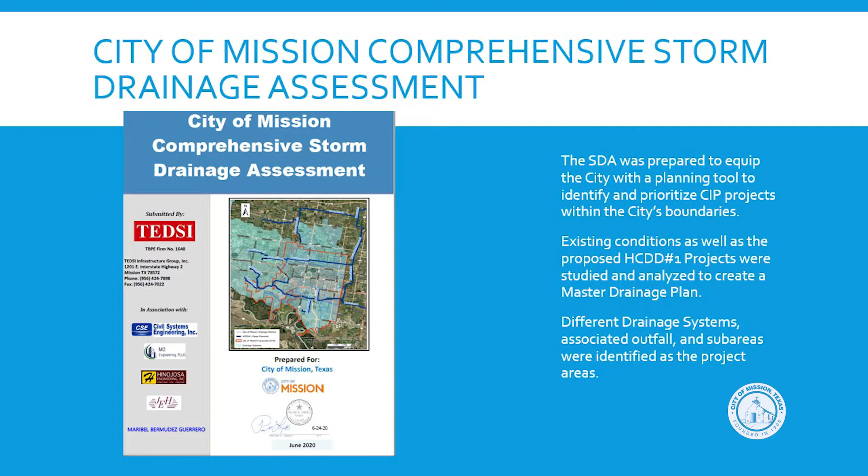We did a comprehensive drainage study, and that identified about 70 projects throughout the city, some major, some minor, some that we can do in-house with our own staff and not necessarily subcontracted out. So we looked at the top priority. Our consultant engineer prioritized the projects, and we looked at the projects that had the most concern.

So we talk about it almost at every city council meeting. You guys are really fast tracking it and making these the focus for our city, working on it really quickly. Yes. Okay, can you tell us about them?

Yes, right now they're all on the design phase, all 7 projects, and we're doing all 7 at the same time. So that's very unheard of, doing them all at once. Yes, because we want to start all 7 projects to impact the community as soon as we can.

As soon as we finish the design phase from the engineers, we'll put it out for bids, receive those bids, and start construction of these projects. We're pushing our consultant engineers to speed up the planning process so we can start construction, because we want to see shovels on the ground, replacement of pipes and drainage pipes and so forth. So that's what we're working on.

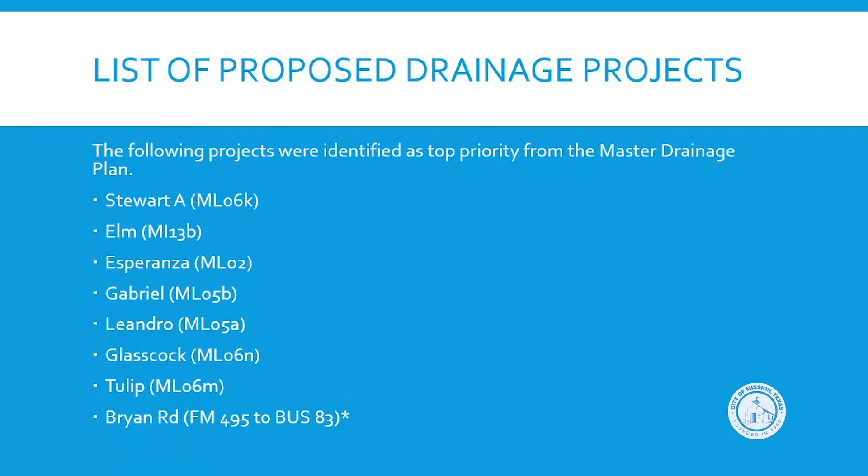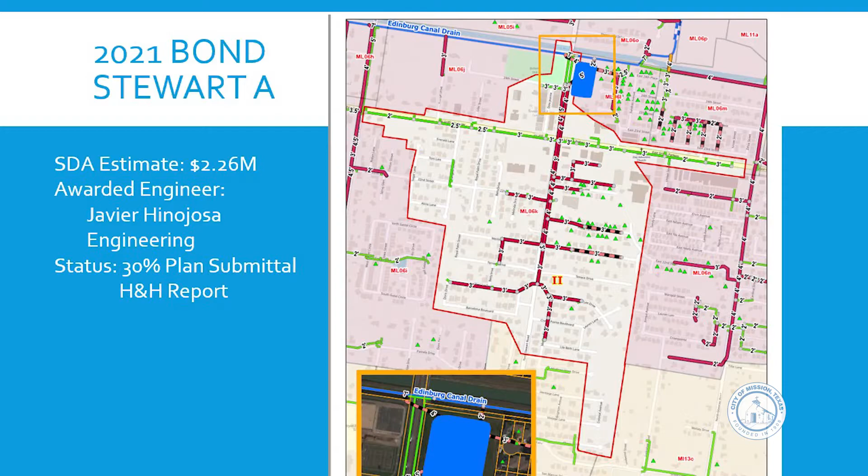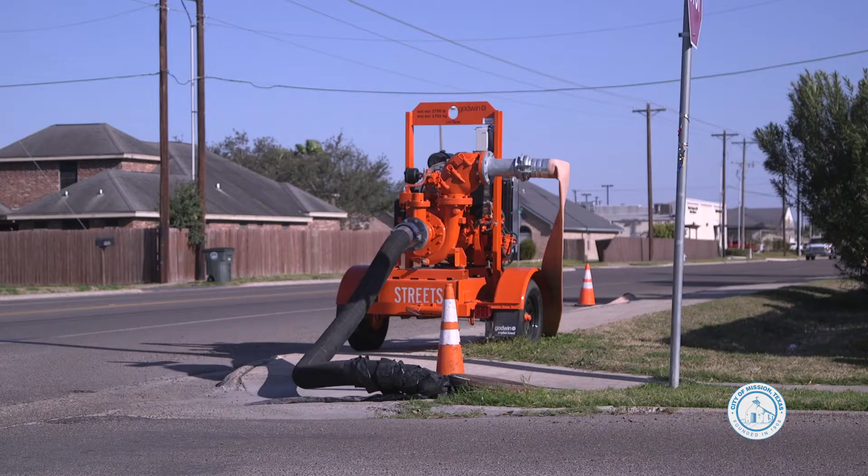So what we're doing there is upgrading the drainage pipes in that area to include within the subdivision, which is 21st and a half, Terrace, and Merlin, those particular streets. If you're familiar with that area, just north of 495, all the way to the Edinburg main canal, which is the irrigation canal, it's going to cross Griffin Parkway.

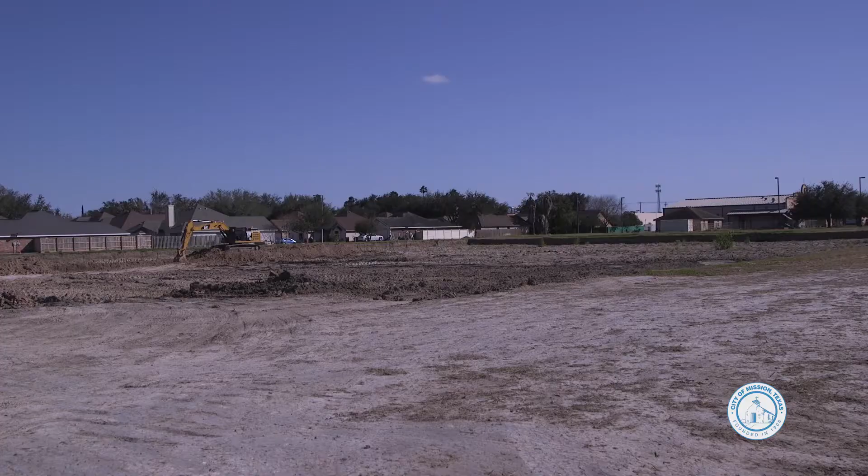One of the things the mayor and the council were able to approve is to acquire some property in that area — approximately over 4 acres just north of 495 next to the church that's there on 495, for the detention pond.

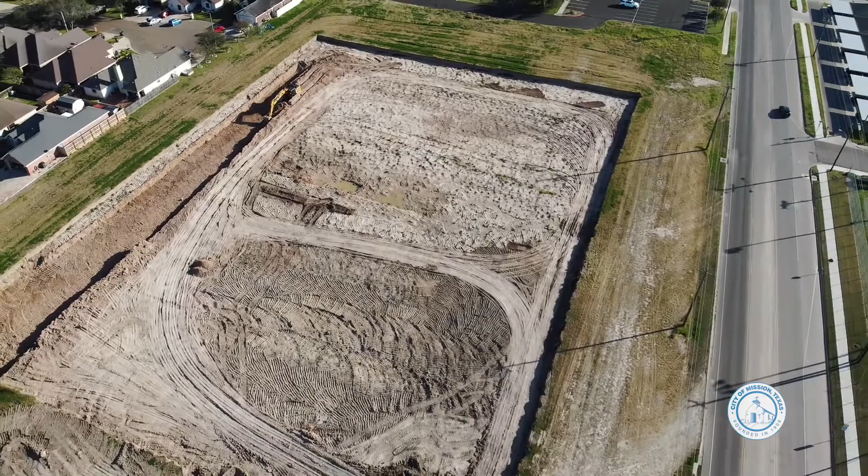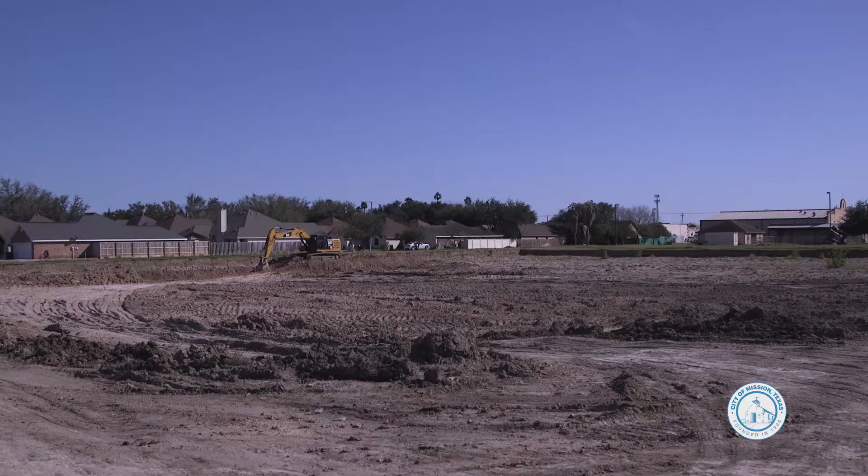This project in particular, STEWART, will take some time to develop and construct. But in the meantime, what we're working on in-house with our own staff is the 4 acres we purchased — we're creating a detention pond. The detention pond will be situated along Stewart Road, parallel to our ditch. That allows the water to flow into the ditch and hold it in the detention pond, slowly flowing into the ditch and slowly receding out.

So that's the Stewart project. Again, that's one of the main projects we're working on, one of the areas with the most concern.

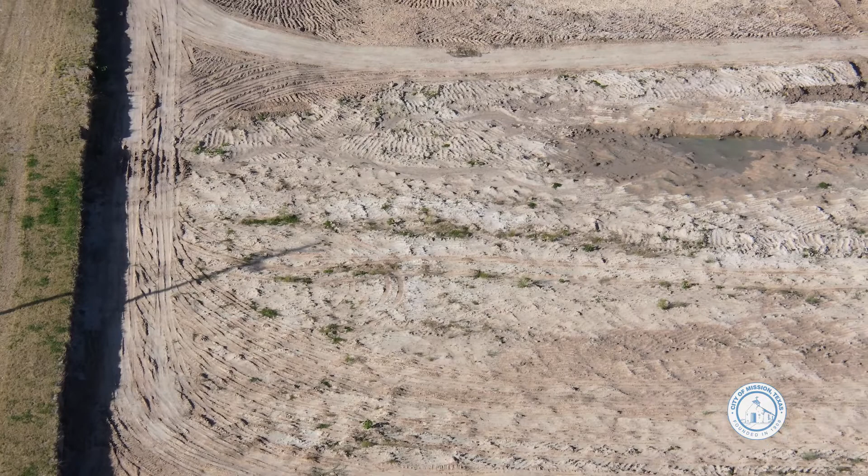So that's our first project that we're looking at. If you live in Mission, we know when there's heavy downpours that Stewart is an issue area. So the residents have to be overjoyed that this is happening.

Yes, we just ask that they're patient with us, because these projects do take some time, unfortunately, but we are working, and that's the important part. We're making progress on this particular project that would alleviate that area, and in the meantime, that detention pond would definitely help while we construct the improvements on Stewart Road.

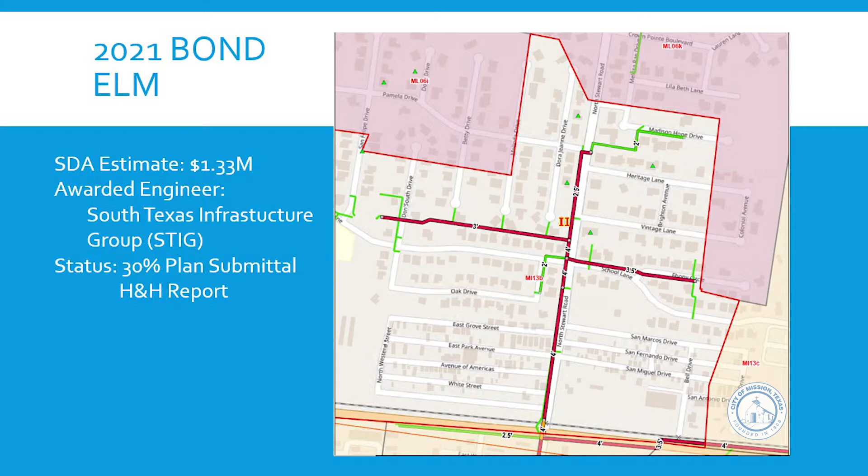So that's the idea, is to continue working on that. Okay, next one? Yes, so the next one we're looking at Elm, and this is approximately about $1.3 million. This is the area between Bryan and Stewart.

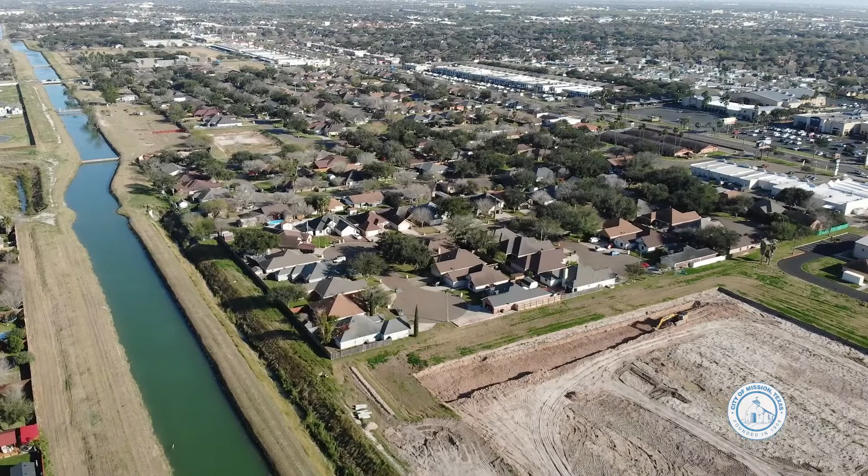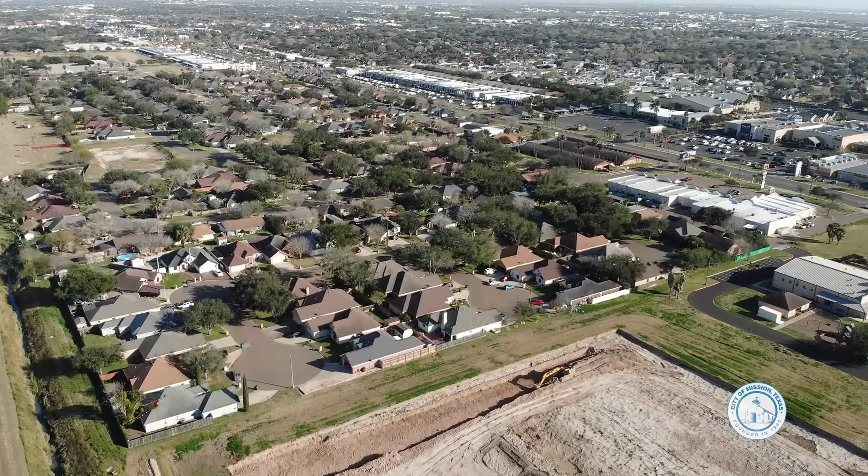Again, same general area. Stewart, this area will impact School Lane, Elm, and Stewart, also Bryan Road. So we're upgrading drainage pipes there as well. That would alleviate that area, and alleviate Stewart going south. Stewart has drainage that goes from half of Stewart between 495 and Business 83, half goes south and half goes north. The southern portion would be alleviated by this improvement on Elm, and also connect into School Lane in this particular project.

Yeah, it's going to be a drainage facelift for that entire area then. Okay, good. Another area that we looked at, again heavy downpours, we're constantly working with, is the Inspiration area just north of 495.

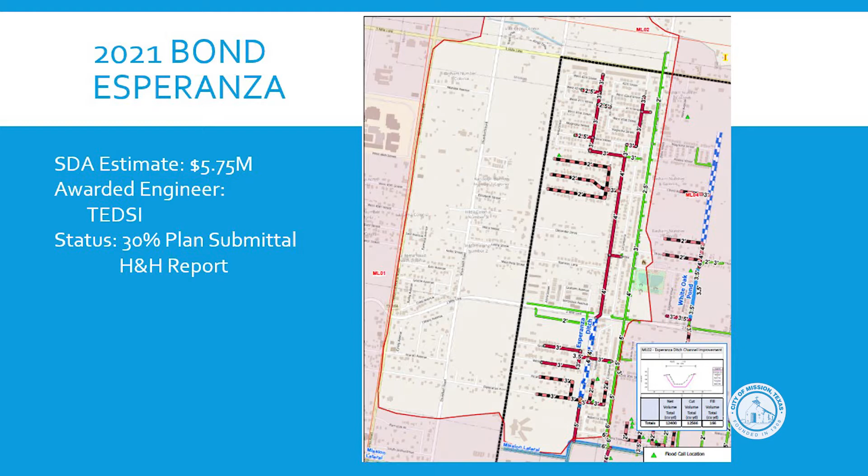This is a larger project, because this project will go all the way to approximately the 1.5 mile line, which is just north of 495, to almost the 3 mile line. It's approximately about $5.7 million on this particular project.

Remind me, what is the name of this subdivision? This is El Valle subdivision. Yeah, so all this area, and these next couple of projects, will assist the El Valle subdivision north all the way to the 3 mile line on Inspiration.

We have grown a lot in that area north of 495, and so we're increasing the size of the pipe. Currently, for example, a pipe is 24 inches, well, we're increasing that to 36 or 42. It just depends on the specific project and area. These are all engineered, so the engineers are looking at the capacity that the area needs.

And so that's what we're looking at. We're obviously going based on their recommendation. This is one of the largest improvements that we're doing, because it'll feed into the subdivisions that are adjacent to it on the east and west. So this is definitely a beneficial project for this particular area.

The folks there have been very vocal about wanting our assistance, so I guess this is a good time to say we're listening to what they're saying. Yes, absolutely, and we've had several community meetings with them within their subdivision, and we've placed temporary pumps out there on occasions when needed, basically to help pump out the water from the streets, not necessarily from their homes. That's something we're constantly monitoring in that area.

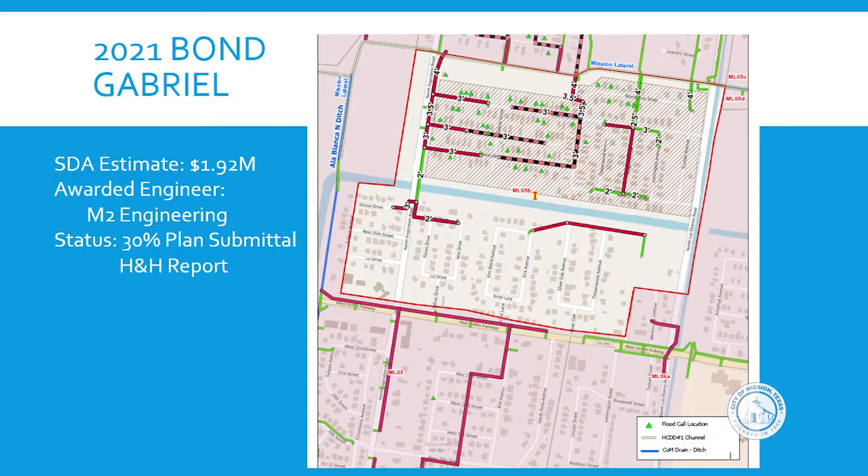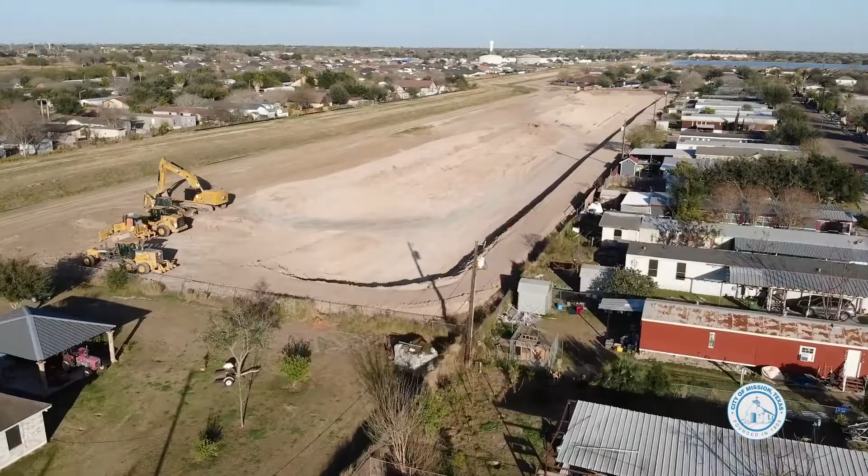So we're looking south of the Mission Lateral, north of the Mission Lateral, for all this Inspiration Road. One of the things we're working on, recently announced, is partnering up with Precinct 3 Commissioner Villarreal on drainage projects, because we share areas within the county. We were able to acquire 4 acres adjacent to the Mission Lateral that would directly benefit this particular subdivision.

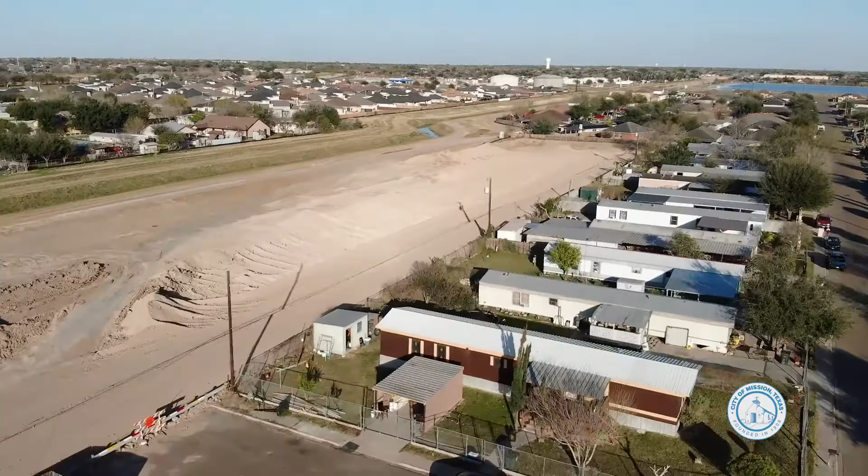And so again, they're building another detention pond like we are on Stewart, while phase 3 of the lateral is expanded in that area. In the meantime, they're going to be creating this detention pond, which will be completed a lot sooner, and that would be alleviating things, because we, as the City of Mission, will be connecting the El Valle subdivision to this detention pond.

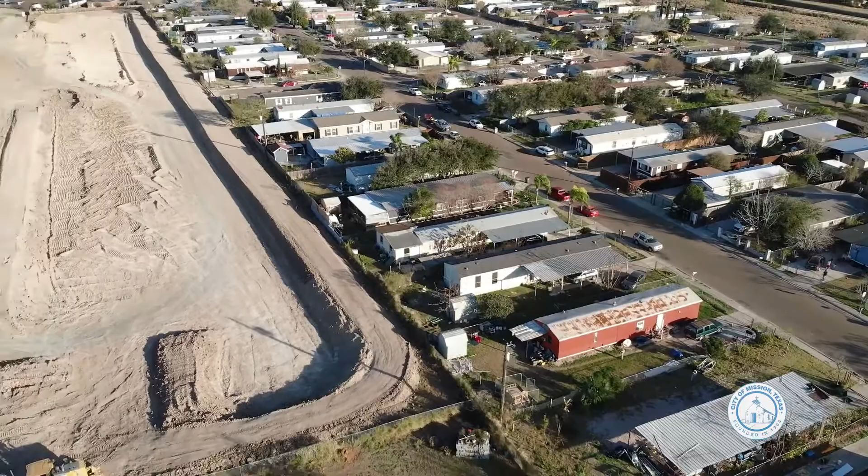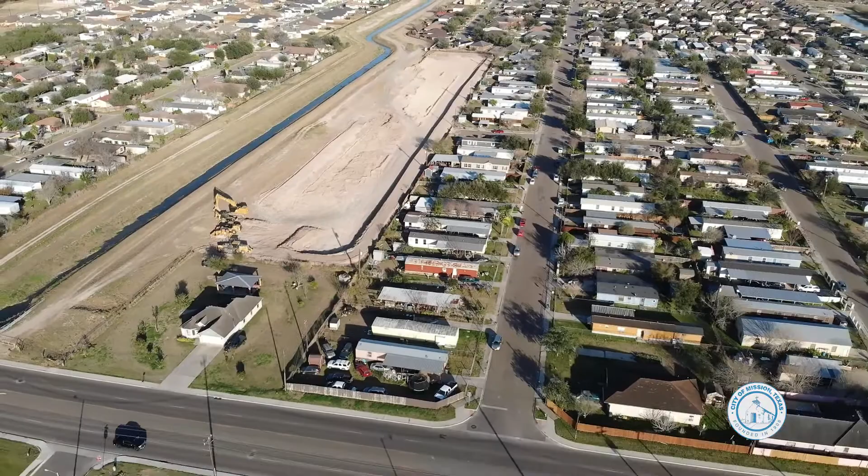It will benefit El Valle subdivision tremendously, and the surrounding areas, but specifically the area that's adjacent to this particular drainage ditch. So we're looking at long-term drainage improvements, but at the same time there's definitely a sense of urgency, because the residents need assistance from us, and these are kind of like a temporary fix too. Yes, I mean, they're temporary in the sense where they could be done a lot faster.

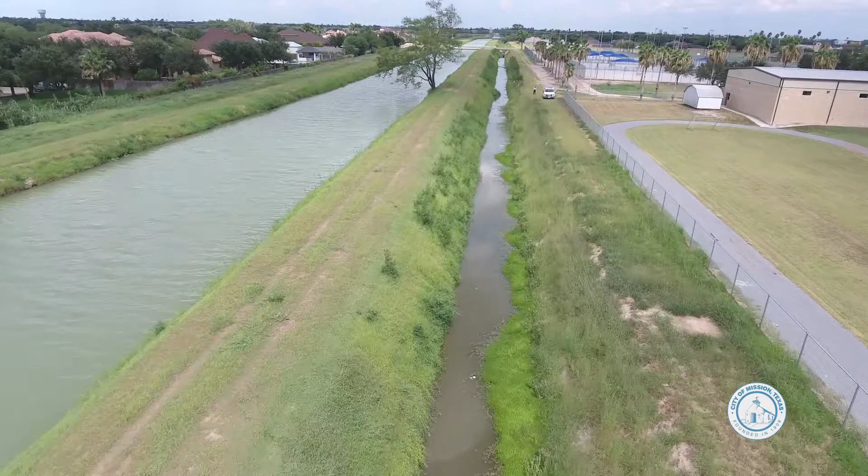Part of the engineering plans that the Drainage District recommends is having detention areas throughout our city. What that does is help the main ditch hold water and slowly release it into the ditch, instead of everything going in all at once. That's part of the plans, and part of why we're looking at property throughout the city for that particular purpose.

The next project within the same area is Leandro, just north of the lateral. We're also looking at Inspiration, Esperanza, and Gabriel, all in the same vicinity north of 495 on Inspiration. A lot of improvements in that area. This is an additional $1.6 million project, all upsizing drainage pipes to increase capacity.

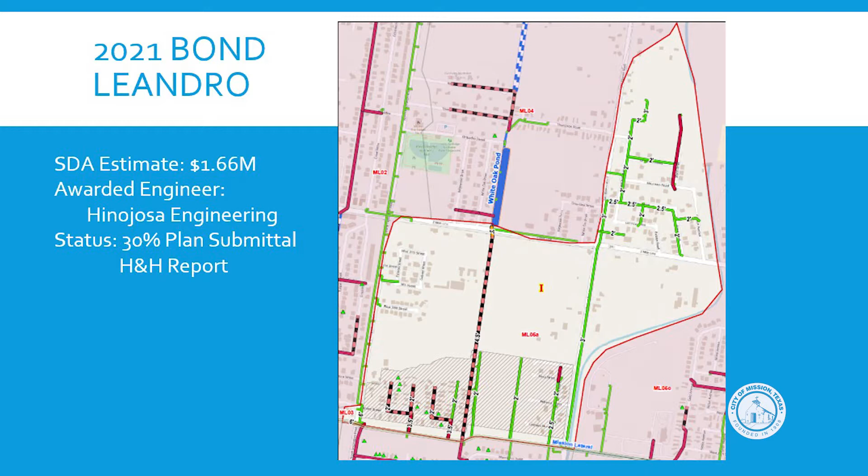The ultimate goal is to drain our streets efficiently and rapidly, to be able to put the water into these detention ponds, and then into our drainage ditches.

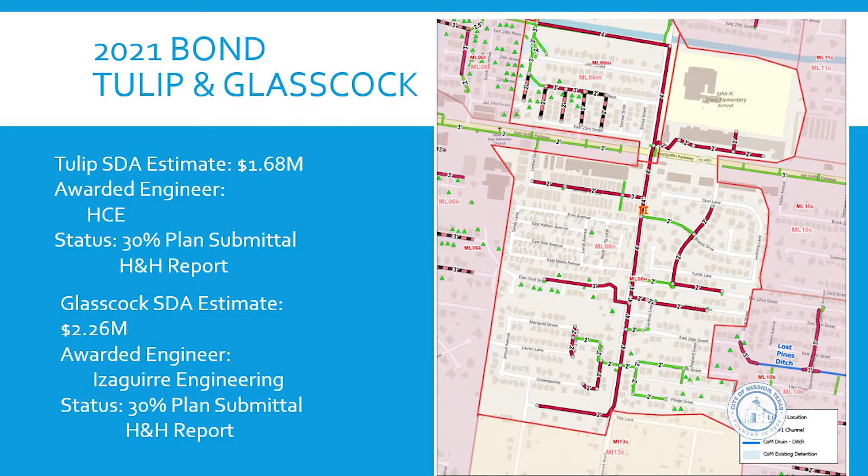The next one shifts to the other quadrant of the city, looking at the GLASSCOCK area, also north of Business 83 to 495, just north of 495 as well. We're calling this the TULIP and GLASSCOCK project because they're interconnecting. It's along GLASSCOCK north, and TULIP is just north of 495.

If you can picture where John H. Shary School is, that vicinity going south of 495 - that's where we're looking at the TULIP project, approximately $1.6 million, and GLASSCOCK is an additional $2.2 million. So that's a big project. Yes, absolutely. These projects would benefit the area.

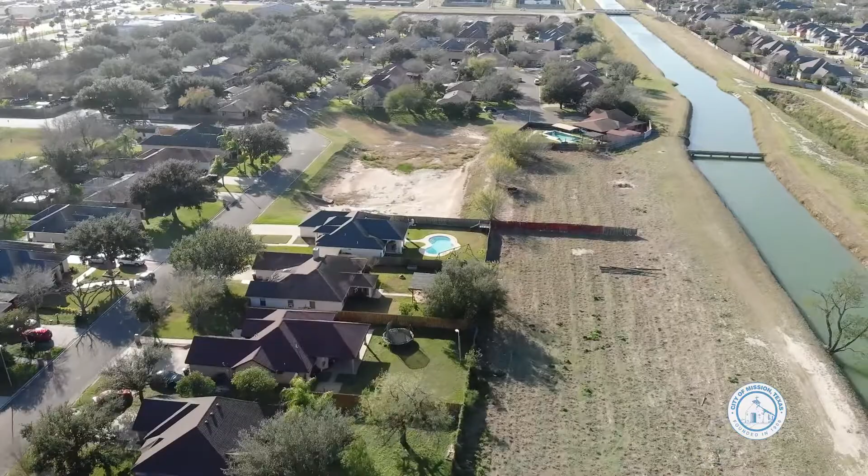We get concerns along the GLASSCOCK area. We've done some improvements in our own ditches there that connect from GLASSCOCK to SHARY. Also in this quadrant is Bryan Road. If you travel Bryan Road from Business 83 to 495, it's somewhat bumpy, so what we're planning is a total reconstruction of Bryan Road.

This is exciting, Randy, because we hear it - I hear it on social media, I know you get the calls about it as well. So this is a big one for us.

Bryan Road is a TxDOT highway from the expressway north to Business 83. From Business 83 north is a City of Mission roadway. One of the things we're doing for Bryan, aside from drainage improvements, is addressing the collection of water in the Elm and Ash area and further down, which would also connect on Elm.

One of the things we're doing is expanding Bryan Road, a reconstruction of the roadway, drainage improvements to increase capacity, but also we're proposing installing sidewalks on both sides of the road.

That is awesome, especially since we have Bryan Elementary right there too. Yeah, so we want to accommodate the schools, but also provide a way for our citizens to walk or exercise along Bryan Road. We see that on Stewart, on SHARY, on Mayberry. That's the goal - to continue that trend and provide sidewalks in those areas.

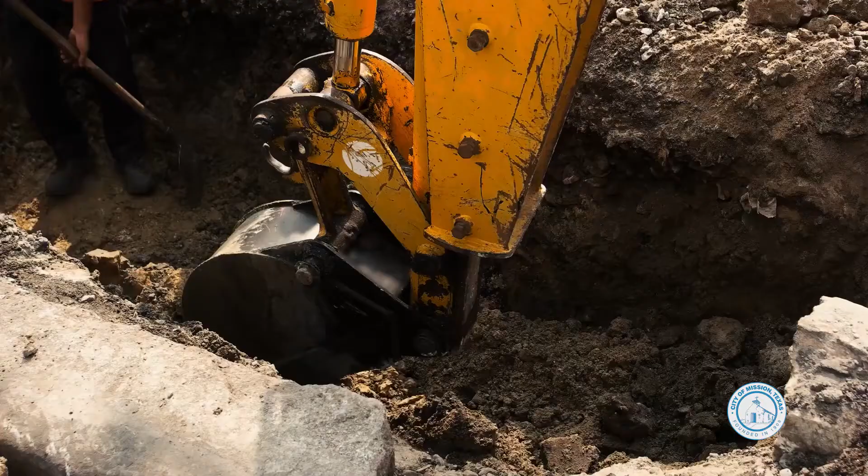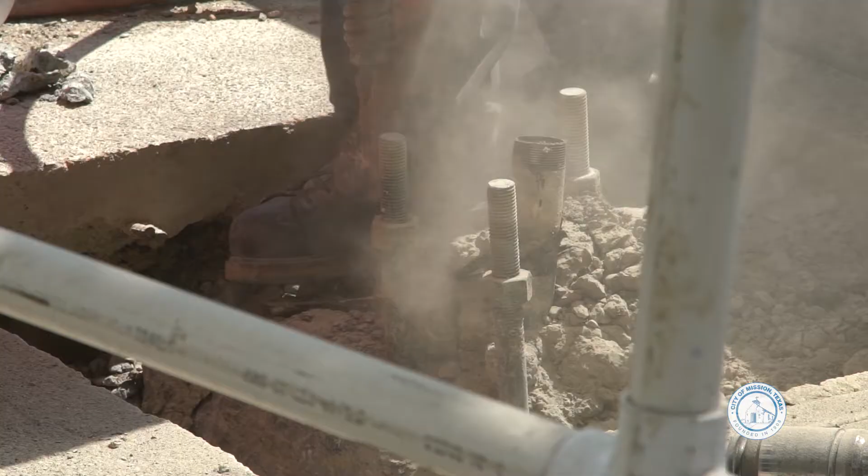That'll be an undertaking for all of us to be patient, because we all know how inconvenient construction sites can be - we'll be coordinating road closures and lane closures and things like that. Once we get into the construction phase, we'll be advising citizens about closures or any type of construction, so everyone can plan accordingly.

We have a number of ditches throughout our city. We've done approximately 14 so far, and we continue doing improvements on this. I'll go briefly through them.

The Sommerset ditch, the Stonegate pond, the Tierra Grande ditch, Lopez Street, Melba Carter ditch, ERMA drainage project, Rene Avenue drainage improvements, the Hacienda/Shary Gardens detention pond, La Cuchilla drain ditch, LEAL subdivision drainage improvements, LEAL subdivision detention pond, the Edinburg Canal drain ditch expansion, the Stewart detention pond, and the Oakland pond.

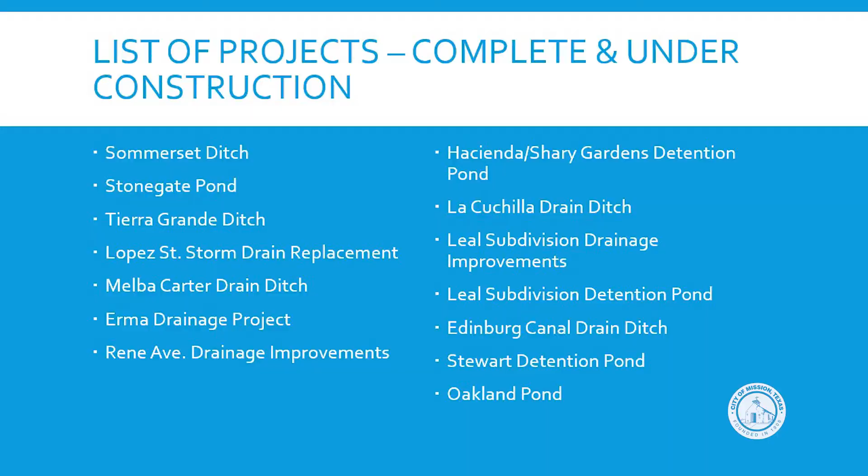I've lived here my whole life and I didn't know we had that much.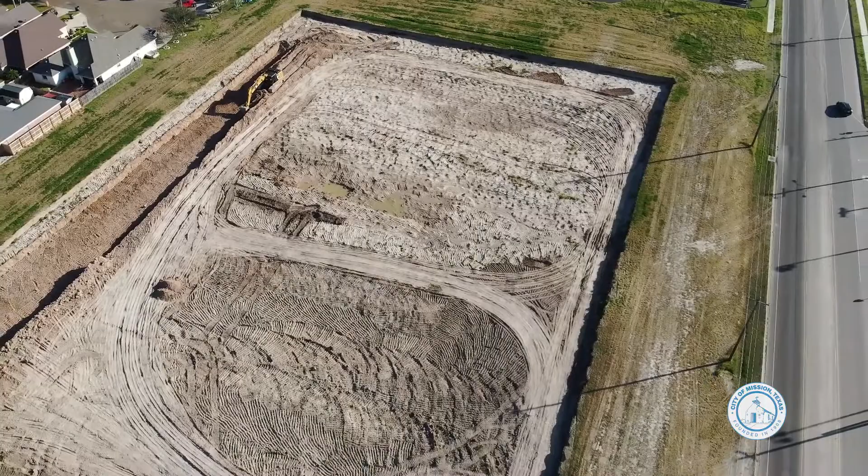So again, these detention ponds throughout our city all serve the same purpose: to hold water and then slowly release it into our ditch, because we definitely don't want to put the ditch over capacity.

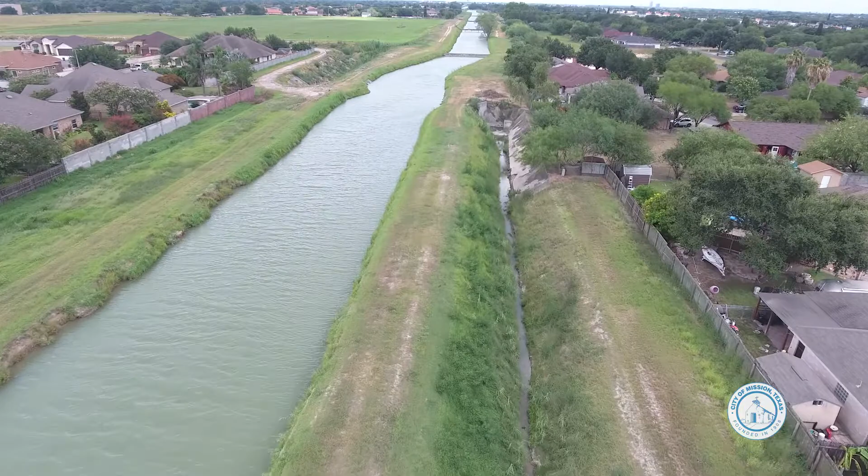The other two projects I'll go over are ones we're working on in partnership with the Drainage District and the county. One is the Pettisville Drain, on South Mission in the Schuerbach area. This would also benefit the Tierra Dorada subdivision.

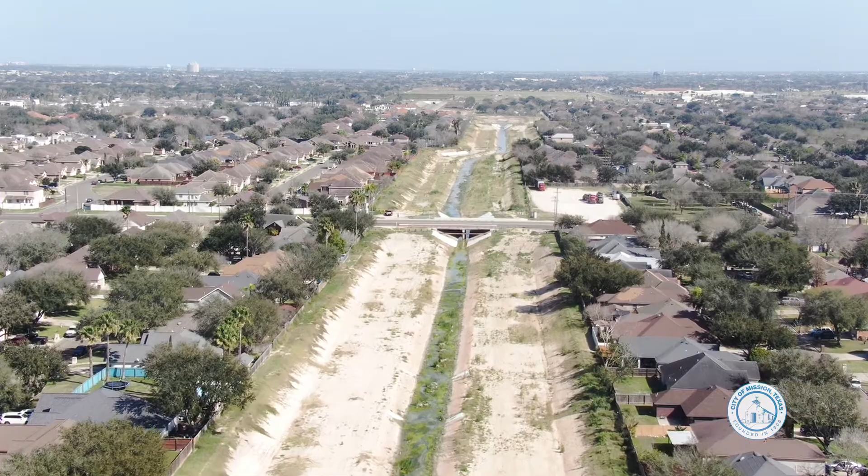What we're doing there is expanding the Pettisville Drain, which connects to the Mission Inlet. We have the Mission Inlet on the south and the Mission Lateral on the north—those are the two main ditches that carry water flowing to the east. All the water moves from west to east through our main ditches.

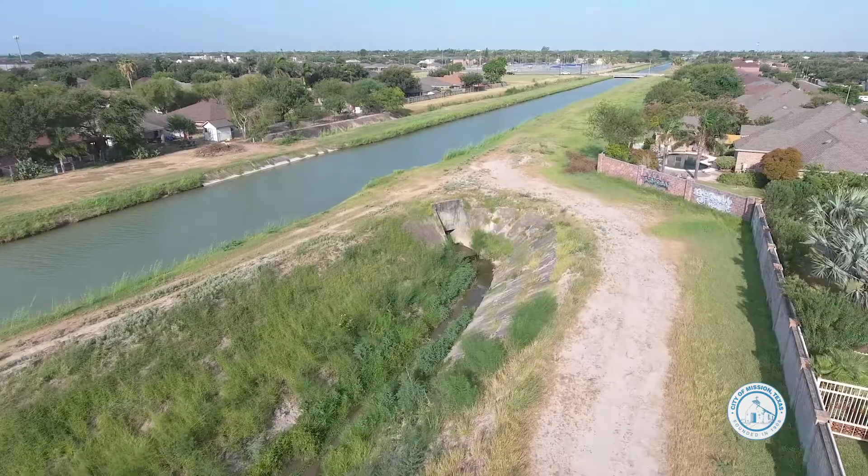We receive water from our neighboring cities to the west, and it flows through us. So those are the things we're working on to help. Every city is making its own improvements, and of course we want to do ours too, to help alleviate capacity on those ditches.

The other project is the Mission Lateral. This was a very important project, not just for the City of Mission but for the Drainage District, because the ditch actually belongs to the county—it's a Drainage District ditch. We call it the Mission Lateral because it's the portion that runs through Mission.

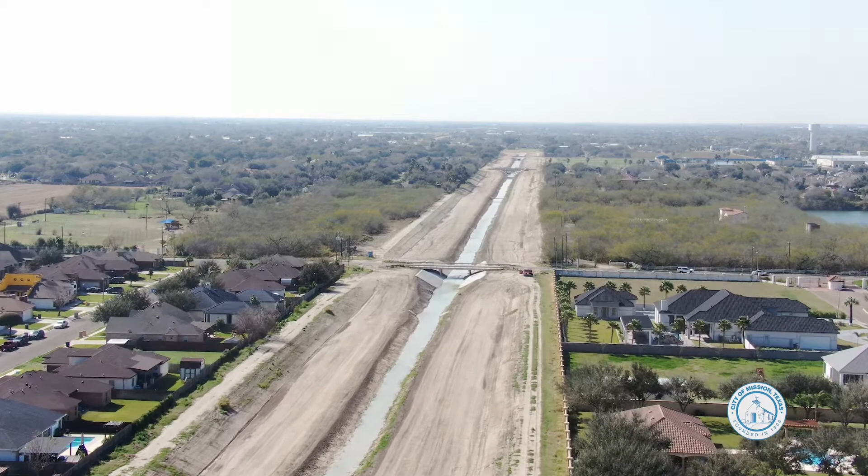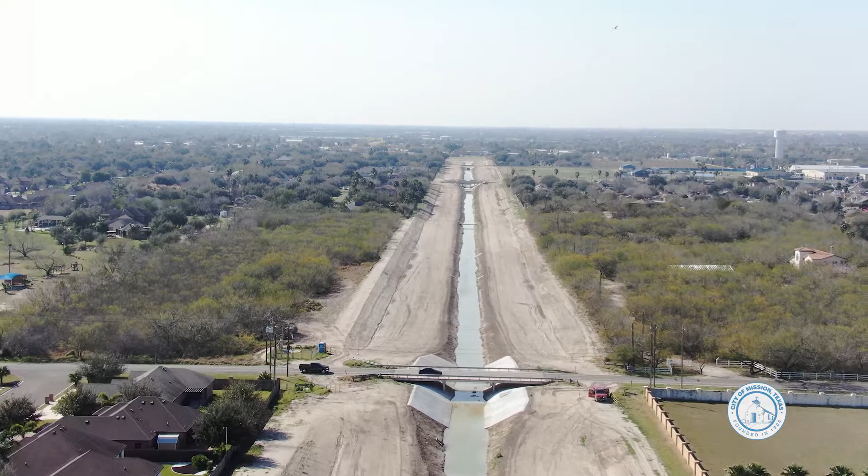This particular ditch is being widened—and has already been widened in parts. It runs from Bentsen Road in McAllen west to Bentsen Palm Drive. It's being expanded to three times its current size: our current width of 50 feet will expand to 160 feet.

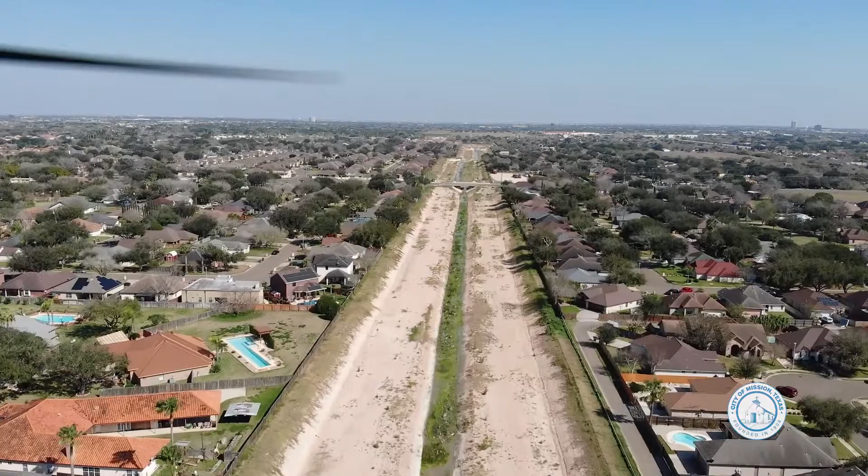That expansion has already started. This project is a Drainage District and county partnership, with us assisting however we can.

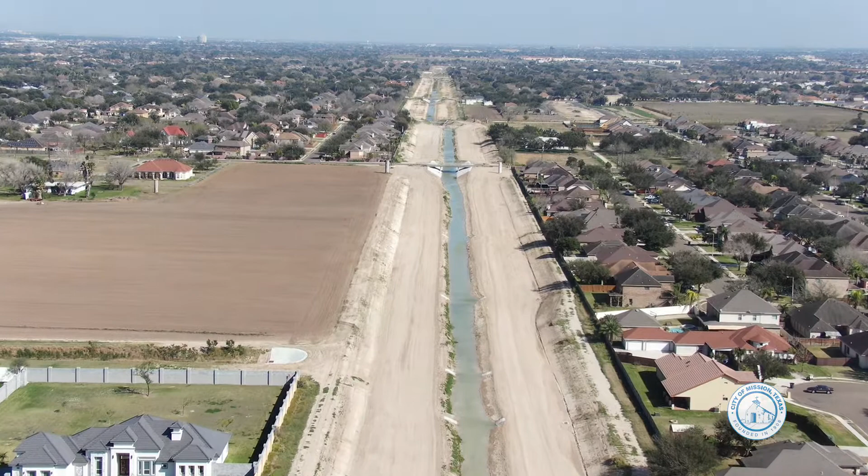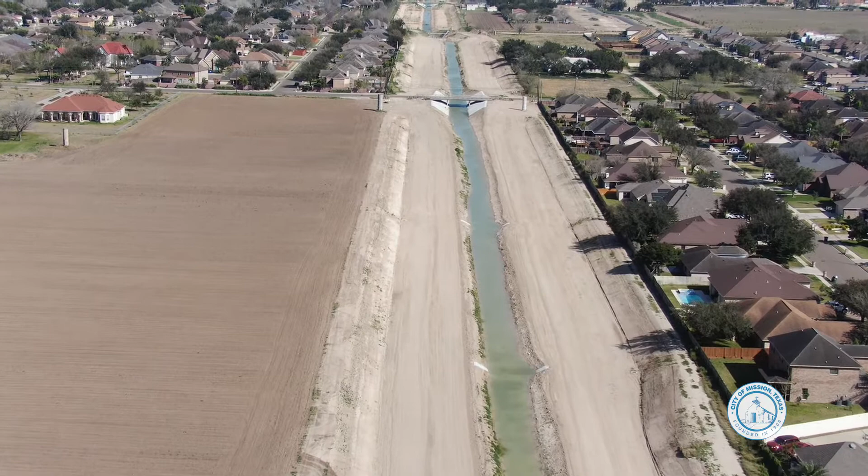It's three phases. Phase 1 runs from Bentsen Road in McAllen to Glasscock Road. That section has already been expanded to 160 feet and completed—we've already seen the improvements and the impact it's had in alleviating water from the streets into the drainage.

Phase 2 ran from Glasscock to Conway, and that section has also been completed—again 160 feet wide, tripling the capacity of water. A great benefit for our citizens.

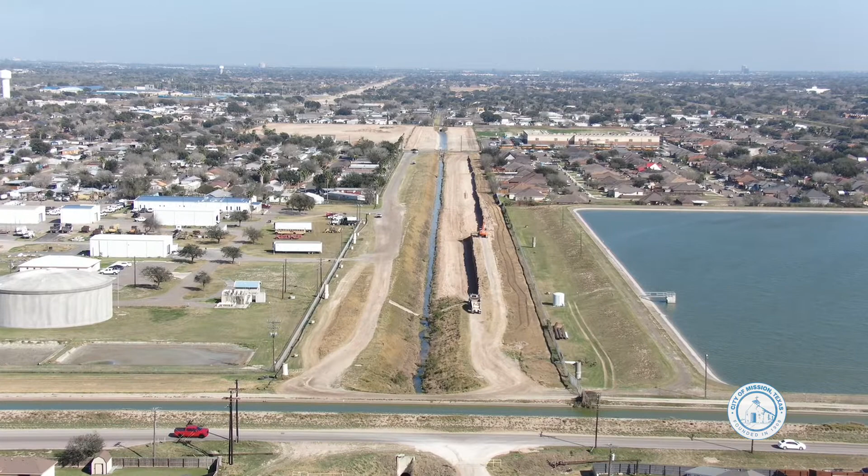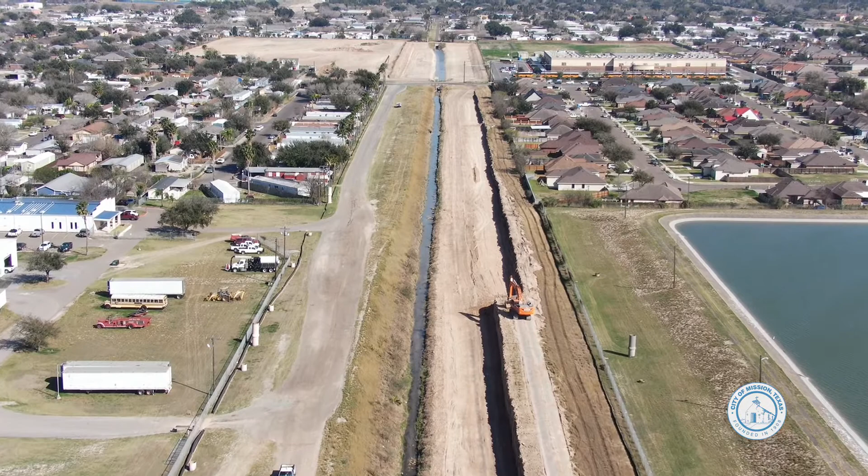Phase 3 has started, from Conway to Bentsen Palm Road, and they're about 15% into that phase—that's why we held the groundbreaking. They've started from Conway west and are currently working in the Holland area, between Holland and Los Ébanos. We're excited because all that area will be impacted by this expansion.

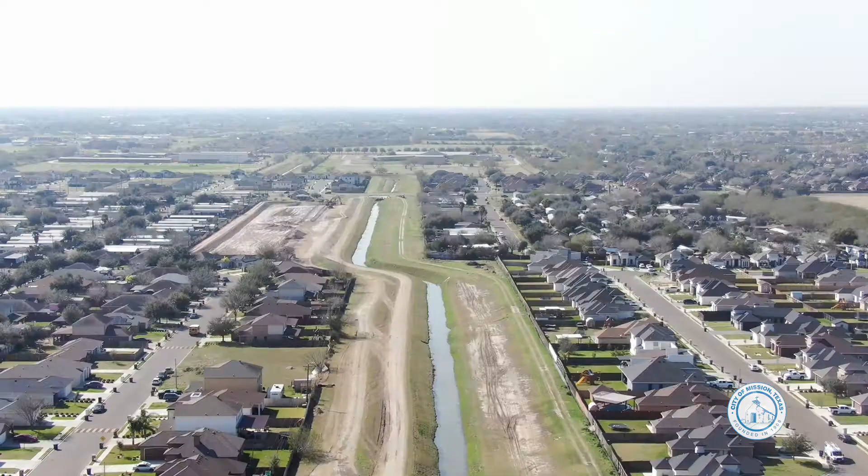Now I'll go over the projects we've done in-house, and we'll show you illustrations of what we've done.

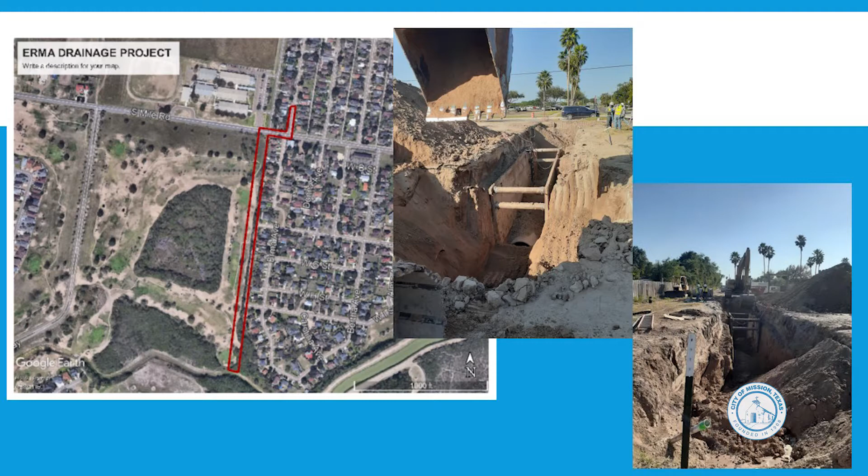The first is our ERMA drainage project in the La Cuchilla area. We installed drainage in the area about one mile south of Los Ébanos, going south, adding drainage capacity to improve that area. That was done entirely as a City of Mission in-house project, at approximately $500,000.

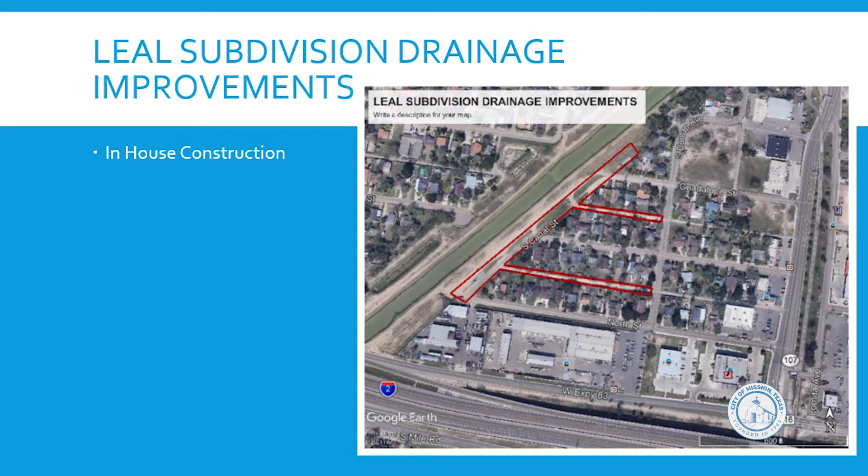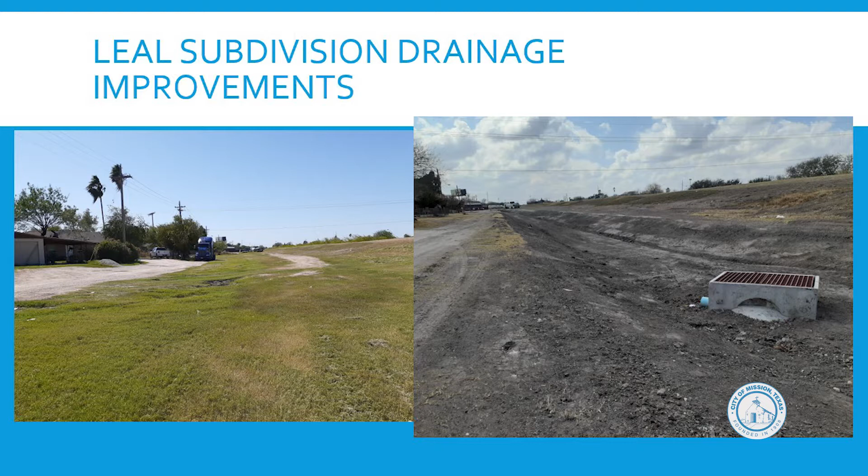The next one is the Leal subdivision drainage improvement. If you picture the Conway Expressway area, north of that you have Guadalupe and Leal streets. There we created a drainage detention site where there wasn't one before—we graded the alleys and streets so water now flows into a long detention pond that connects to two other detention ponds just west of that.

That's had a huge impact in that area—we saw the difference in rain events right after construction. It runs along the irrigation canal; we basically dug a detention pond so water flows in there, getting it out of our streets, and then from there it goes into our larger detention ponds. It's doing what it's supposed to do.

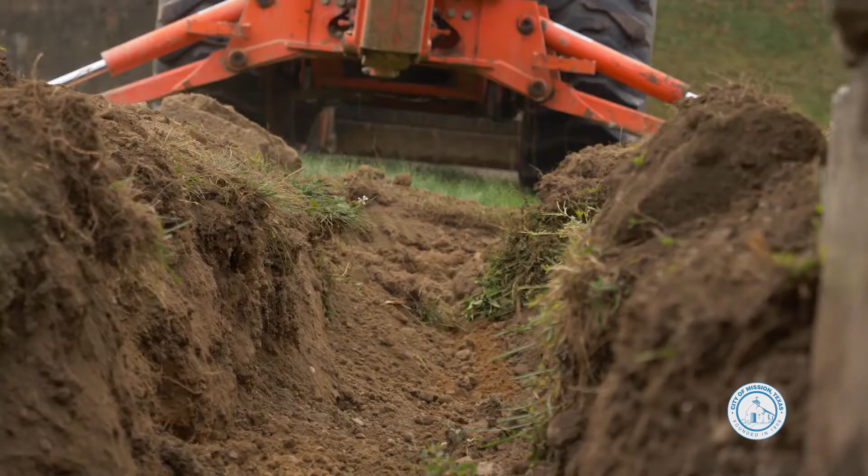The other projects either created a new detention pond or expanded capacity—expanding by digging wider or deeper to hold more water.

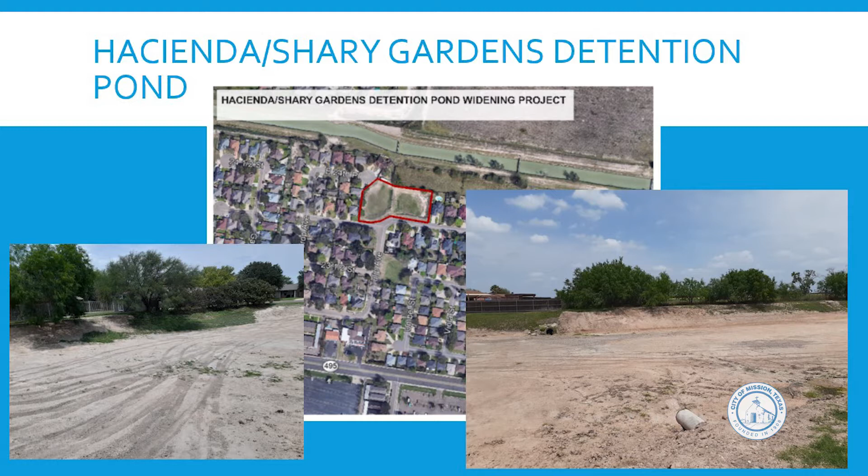This one is Hacienda Shary Gardens. This is the area on 495, east of Stewart, north of 495. There's a detention pond back there behind the subdivision that we improved and made larger, so it has additional capacity. It'll alleviate water from the streets, and help all that area all the way to Glasscock. So this is the Hacienda Shary Gardens detention pond.

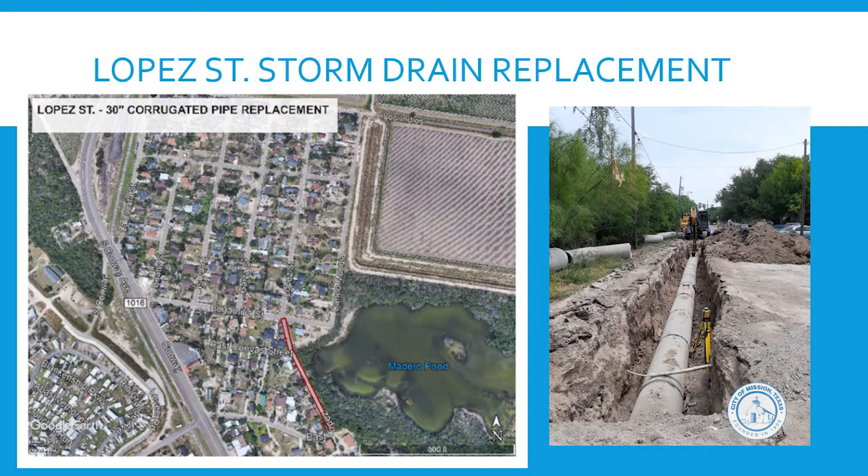We called it the widening project. The other area that we worked on is Lopez Street, located in Madero. We had an area there that we upgraded a drainage pipe in. That would help the Bougainvillea, the Cando Munguia area, Lopez Street, Garza, East Cueva Street — all that area will be impacted by this additional drainage.

And so we want to look at all the different quadrants of the city to be able to address concerns, and distribute them throughout, because we want to make an impact throughout our city. It feels like we did blanket the city, and there's improvements going on all over the place, which is good.

Yes, correct. And so one of the things we're looking at as well is city-owned properties that we have throughout, that we can create detention ponds. Detention ponds that we can also create parks with, whether it's soccer fields and things like that — if we can put some goals out there, kids can use it because grass will grow on it. We can create parks out of them. So we're looking at different areas throughout the city.

We do have some property in the Dunlap, Guadalupe, Leal area that I covered earlier, that we'll be looking at for an additional detention pond as well.

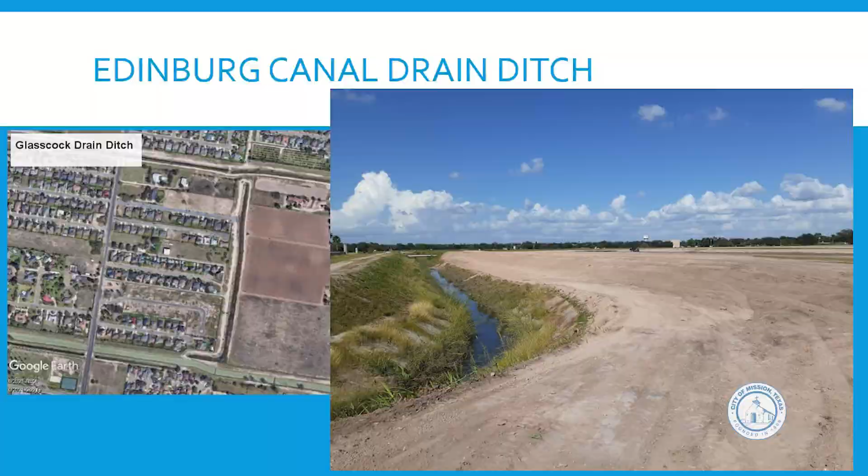So that's another project. The Edinburg Canal — what we refer to as the Edinburg Canal drain ditch expansion — is a section that runs between Glasscock and Stewart that connects to our Mission Lateral. We see subdivisions going up off of Glasscock, and we have to account for that growth within our drainage system.

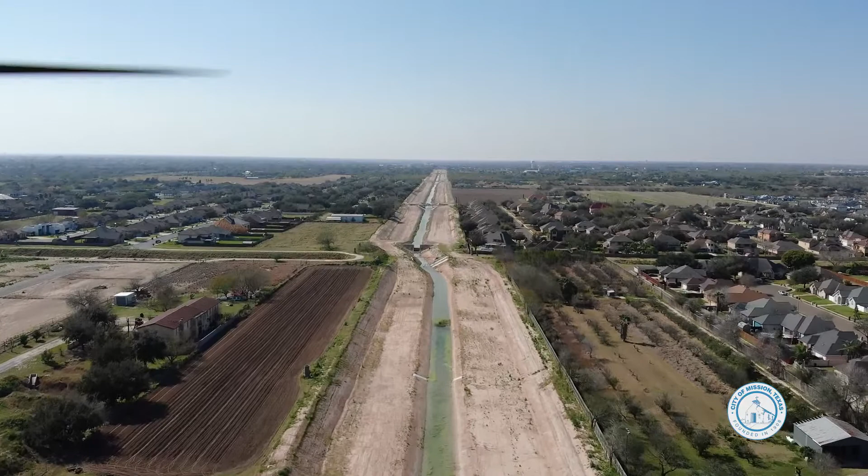So we expanded the ditch with the developers as partners to expand the Glasscock ditch that runs north and south. If you picture between Stewart and Glasscock, there's a ditch that runs north and south adjacent to the subdivision. That got expanded to accommodate the additional growth and increase capacity. So that's another ditch where we helped create capacity.

So we have a lot of big drainage improvements we're fixing to kick off, but we've also been working on a whole slew of smaller ones too. Yes, and that's the intent — to alleviate water from our streets — and that's why we're creating and adding capacity to our drainage ditches.

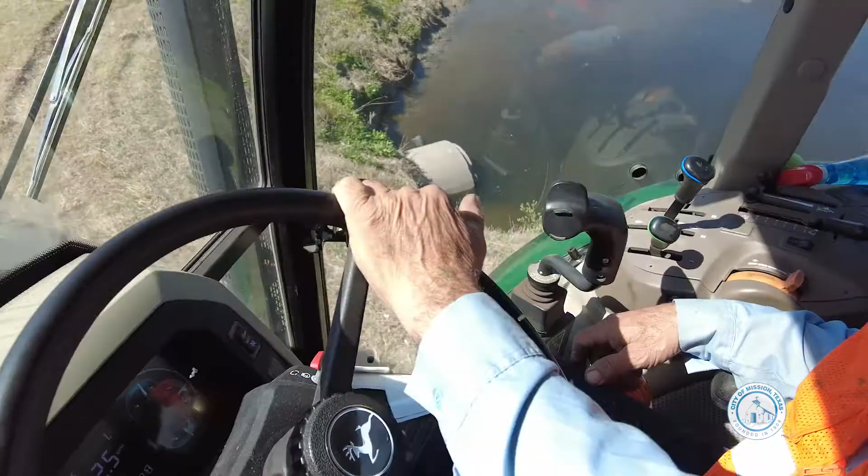Not only are we expanding our ditches, but also doing constant maintenance on them, because vegetation grows on these ditches naturally, so we go out there and excavate to make sure they're clean and the flow is constant when needed. We don't want anything to restrict the water, so we're constantly maintaining our ditches for that purpose.

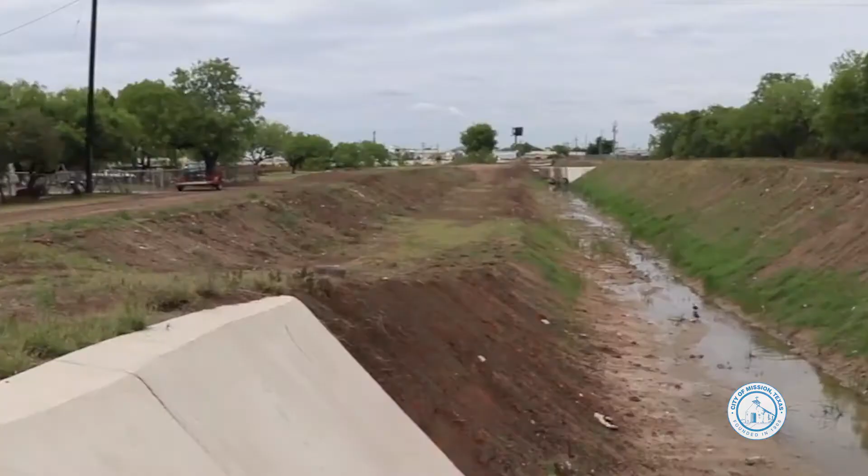Our residents can help with that as well, right? Yes, absolutely, especially if they're adjacent to a ditch. Any lawn maintenance that would help, whether it's overgrown grass or weeds, because that prevents water from flowing faster. Yeah, that ends up in our ditches. Yes, so that would definitely help — anything they can do, especially if they're adjacent to a ditch.

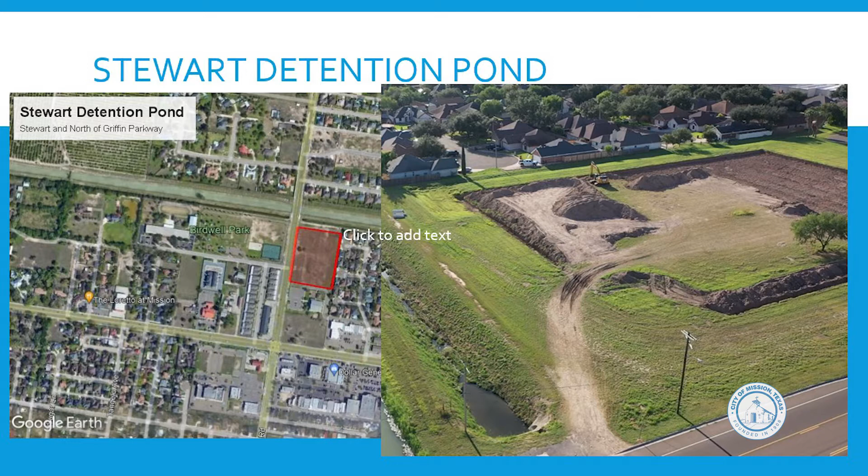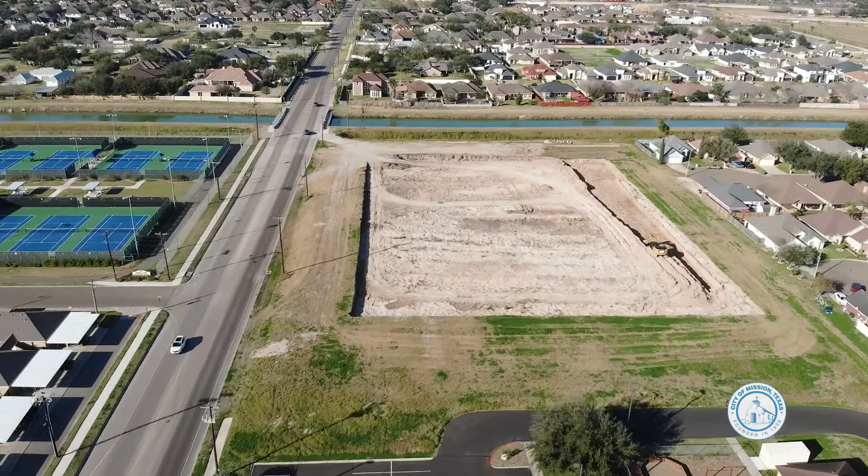One of the things I shared earlier is the detention property we acquired, about 4 acres off of Stewart, and that's ongoing. This will be a major detention area that will be fenced up for protection, because we're looking at capacity for that whole area north of 495 on Stewart. So that's a major project for us — we've been working on it for some time because the digging and excavating takes time, and we're doing it with our own employees as an in-house project to be efficient.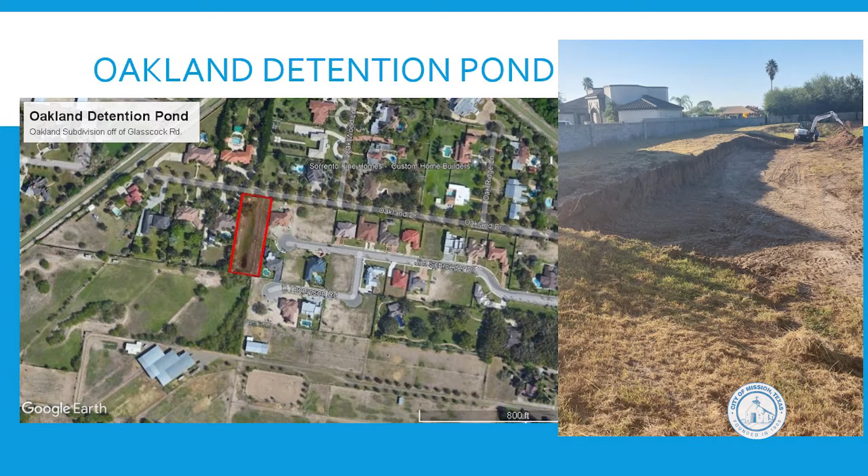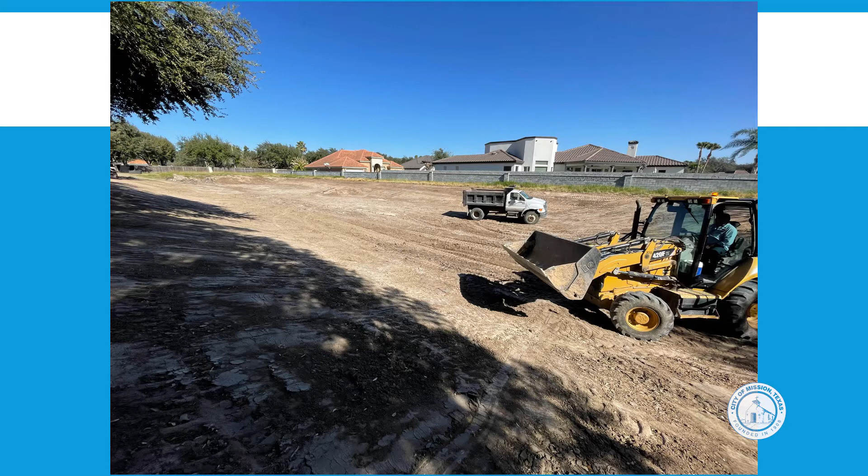Another detention pond we excavated recently and increased capacity on was the Oakland detention pond, in the area north of Two Mile Line on Glasscock. This area would benefit the area from Two Mile Line to our city limits on Glasscock. Those subdivisions are connected to this pond, which eventually drains into the Mission Lateral. So we added capacity, excavated it, to alleviate water from them. This is a project we already completed, again worked on with our own staff, and they've been very instrumental in this.

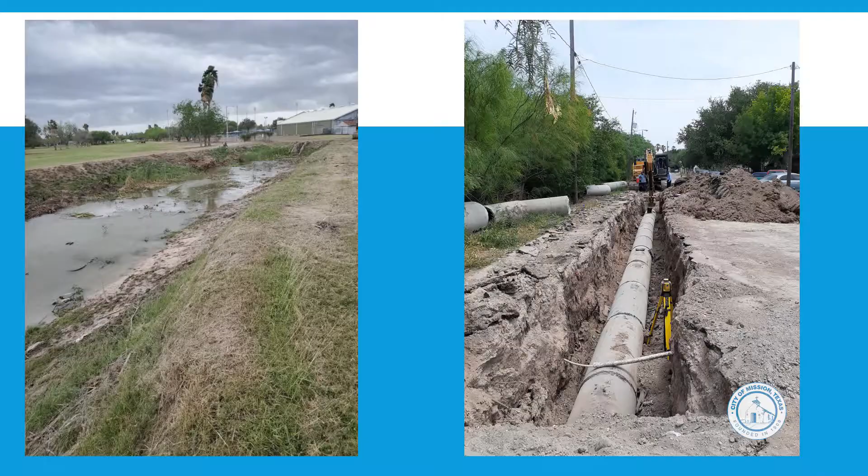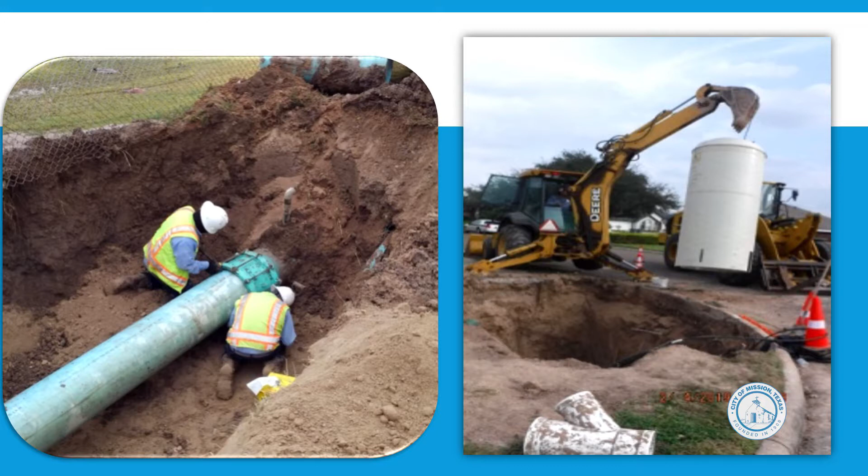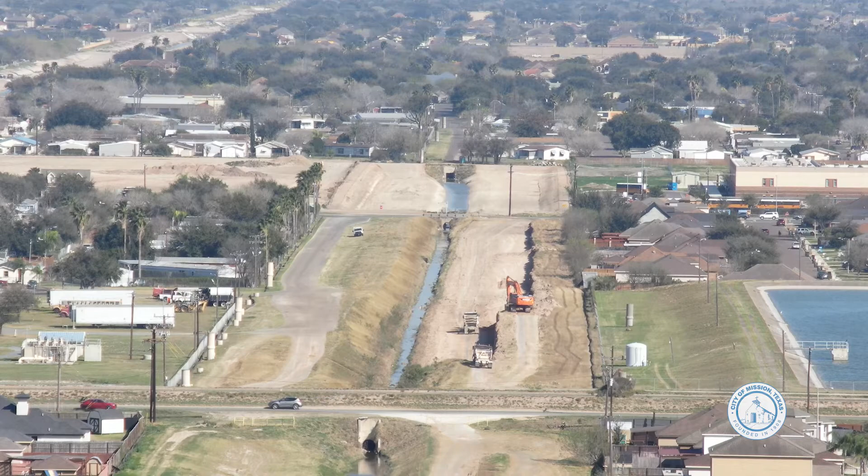And I want to take the time to thank staff. We get to a project, we get the instruction of the direction of the project, and the staff goes and works as hard as they can to finish, because they know how critical it is to complete these projects in a timely manner. Especially right before our hurricane season, we want to make sure all these ditches are maintained, clean, excavated, and so that's the goal. I want to thank staff for the hard work they've done, because we've done quite a few improvements throughout our city. It's difficult to visualize the improvement if you don't have the before and after, or see the improvement itself, in pictures or in person.

So we'll share that with the public. I'm sure this is really interesting and enlightening for residents. I work here, and I didn't know how much had been done and how much is being done moving forward. So there's a lot of exciting improvements.

Yes, and again, this is just one area we're looking at. That's the purpose of this, right? We want to share this information with the public, utilize it to share all the details we have, because for us this is work behind the scenes. But we want to make the public aware of things we're doing, because every day our goal is to continually improve our city, to continually progress. We want our city to grow, to be safe, to be dry from any flooding.

So that's our primary goal, to continue that. Moving forward, our goal is always to alleviate flooding for our residents. But I know folks at home watching our Mission Cable channel are going to ask, okay, when is this happening? Can you give us a loose timeline? You said maybe construction in summer, but what are we looking at long term? Like I mentioned, these are long-term projects.

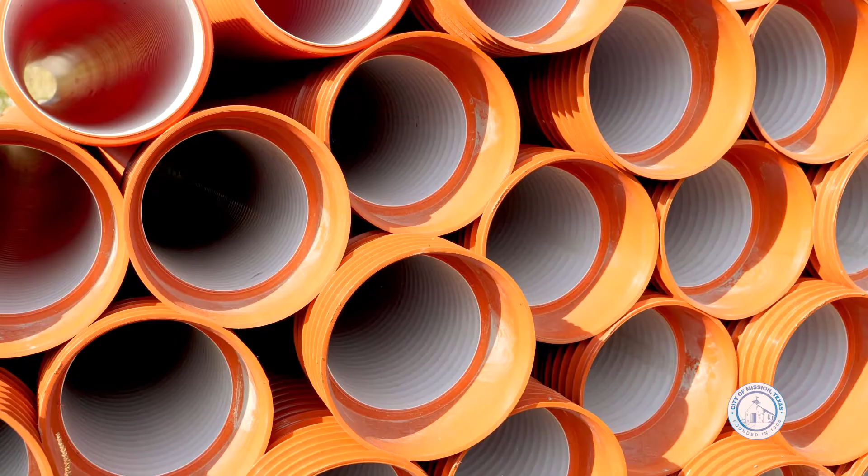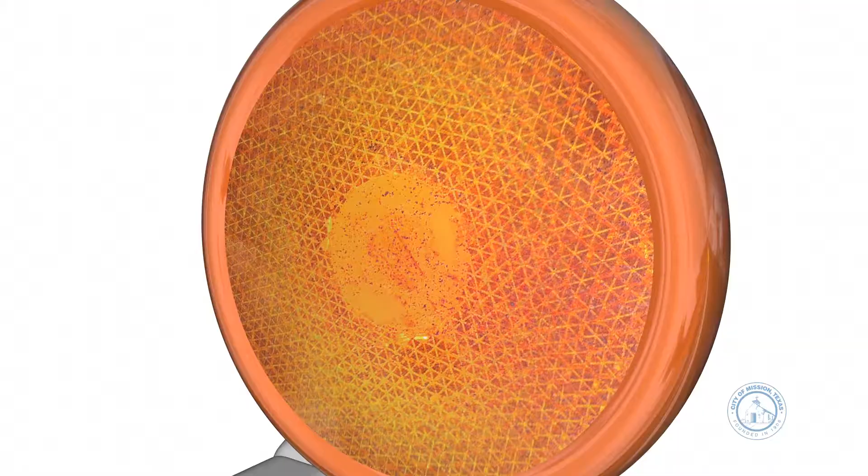Construction could start in the summer, and again, we want to be aggressive with this timeline. We want to push our contractors as soon as we start construction to try and take care of this. But we know construction takes time, so we're looking at 6 to 8 months at the most, depending on the size. Each project is unique and different in size, some require more, some require less, so each of them has a different timeline, but more or less that's what we're looking at.

God willing, a year from now we're going to be looking back saying we did all these improvements in the last year or so. There are a lot of things we're working on. It might seem like a long time, right, and we understand hurricane season comes and goes and then comes again.

But that's why we're doing the improvements on the detention areas. The Mission lateral expansion is huge. Phase 3 should be completed before we start construction, or at the construction phase, and that's their own timeline. However, we're constantly in communication with the county to see if we want to expedite these projects, right, and that would alleviate a lot of it.

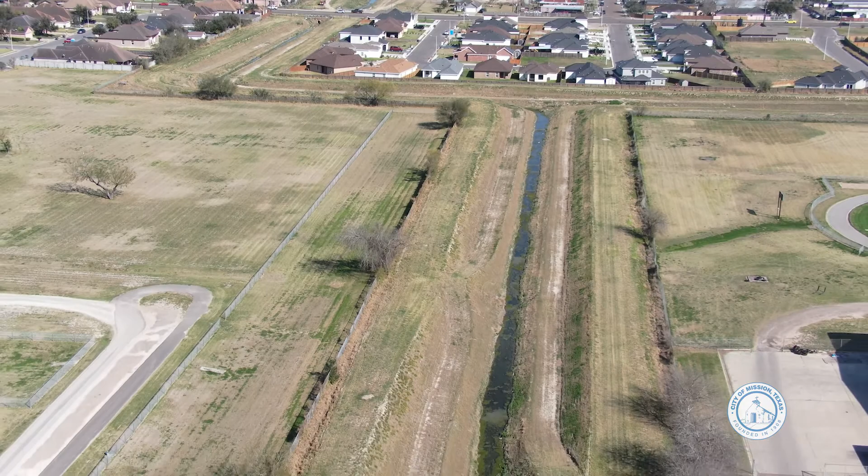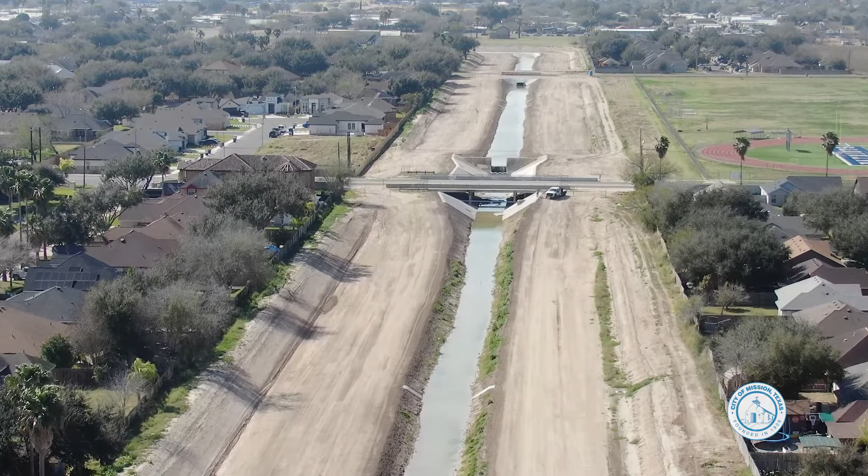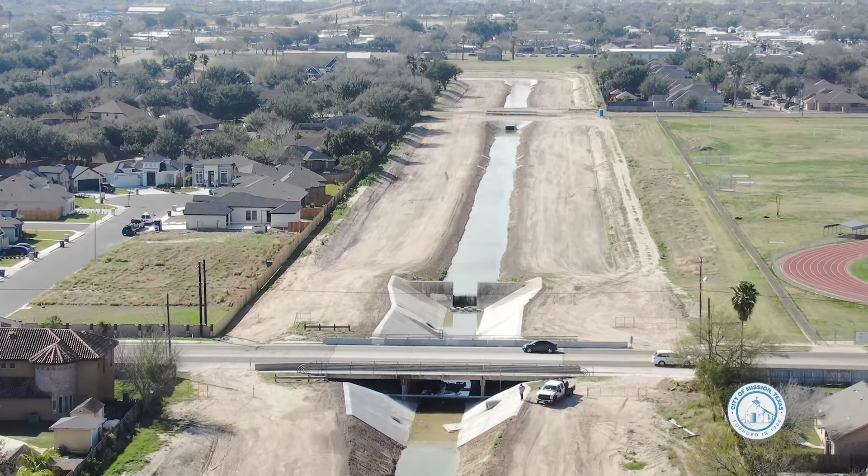Part of the drainage study is the detention part, and the other part is the capacity. We're looking at increasing the capacity of our drainage pipes, but at the end of the day it falls into the lateral, which is 160 feet wide now and can hold a lot of water, and that has helped. We've already seen phase 1, phase 2, the impact it does on those areas, so we're excited about phase 3. We're continuing working on those, but that doesn't mean we're not going to continue, because we also have other city-owned properties where we're working on detention facilities as well, and we'll provide an update later on those additional detention facilities we've created.

But more importantly, know and assure the public that we're continually working on issues we feel are very critical to our community. It's always a work in progress for us.